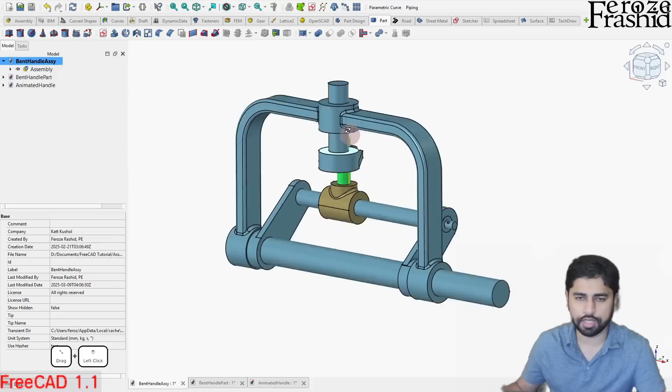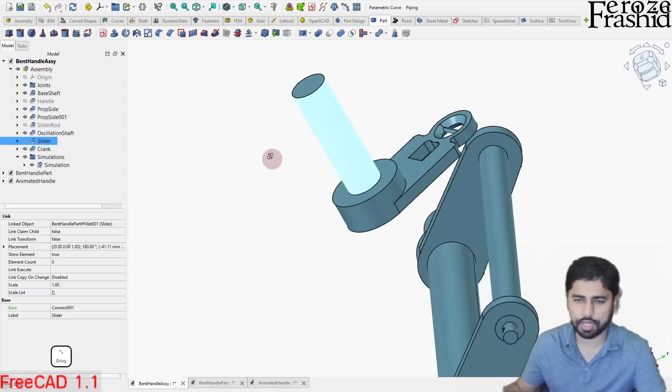Today we will focus on the driving shaft, specifically we named it crank here. To take a good look at it, let's hide everything else. So this is the one we want to build. We don't want to go into all the details right now. It will be a shaft and a shaft holder in the middle, and then a handle with a circular end. That's what we want to build in today's video.

Previously we created a file with a handle, and now we want to build another part. The first part of that is going to be a cylinder.

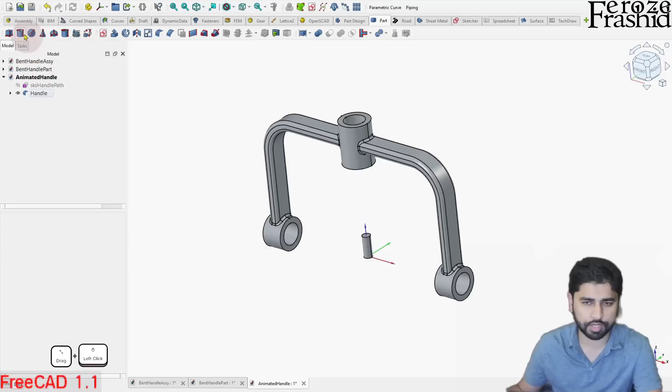So the cylinder, we can create a primitive right here. It's pretty easy - go into cylinder and then update the radius, say 5, and height, let's say 50 for now.

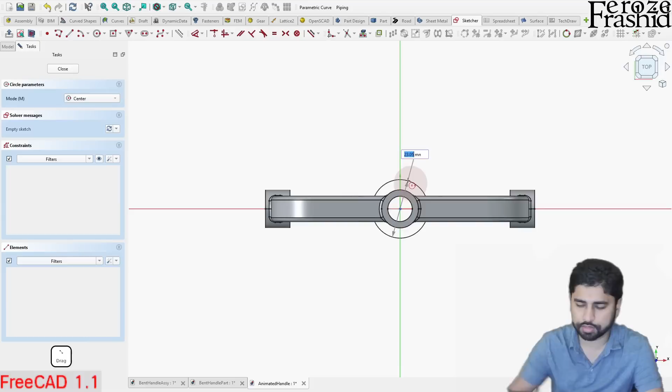That's one way to do it. Another way is the fully organic way: draw a sketch on the XY plane and draw a circle of radius 5 millimeters, diameter 10 millimeters. That's all we have in this sketch. We select this sketch and extrude it for the length we want, say 25 millimeters.

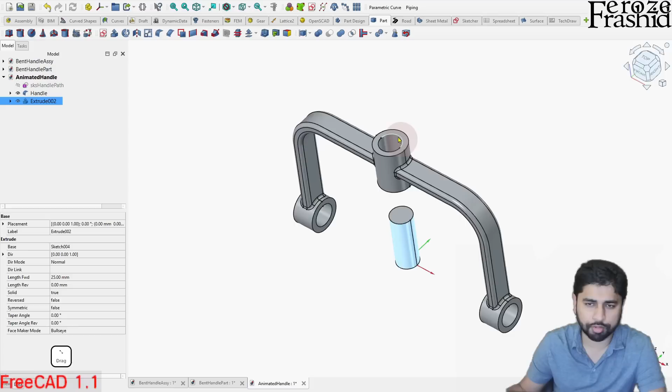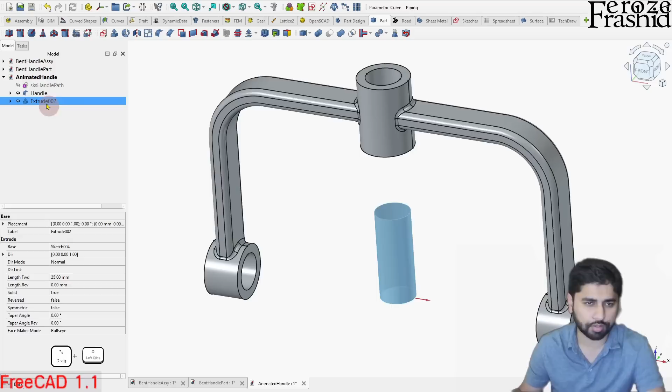It's important that this cylinder fits into the hole we previously created. I remember this hole being 10 millimeter diameter, so it's important that you create this as a 10 millimeter diameter cylinder as well. That's the first part. If we want to make it longer or shorter in length, we can come back and adjust it. So I want to rename it here and say shaft - driving shaft.

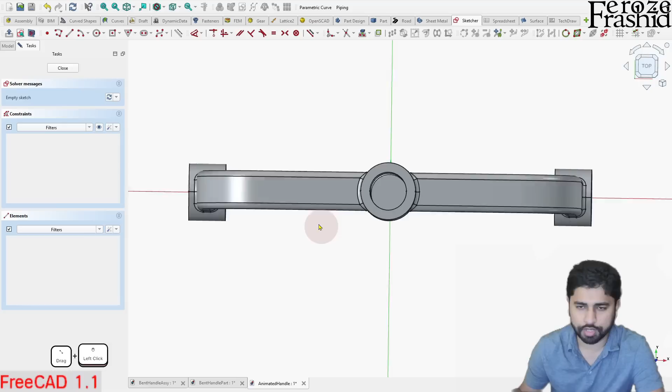Now I want to build this lower part. Maybe let's call that a crank. That one I want to draw from a sketch as well. Maybe we can hide this handle for now. Let's go back, and in here let's turn on the cross-section view.

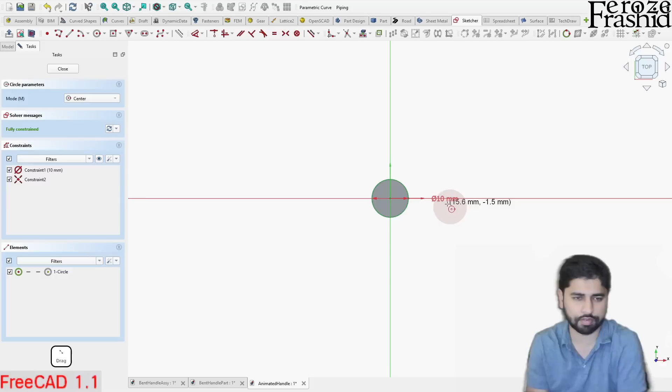Obviously the middle part will be a 10 millimeter diameter radius, and that's pretty much fixed, so we are not changing it. Let's not bother going into external geometries, referencing the previous part - we can just keep it simple. Then I want to draw an arc, something like this. There's an opening on the upper side, and I want to draw a rectangle to fill up that opening.

Let's refine this further. I want to delete this lower end, take these two points. Here's one trick: if you select these two points manually without pressing Control on the keyboard, they will be selected, because the sketcher mode has a hungry selection mode, so you can keep selecting.

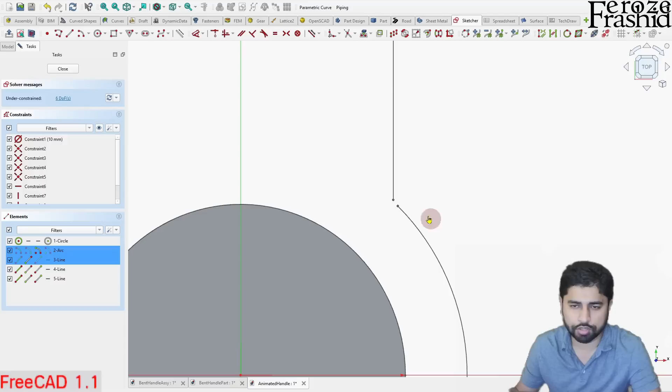Or you can go down-right, which will only select whole entities within that selection box. Going top-left will select everything that partially falls into that area. So we want to go select down-right - these two vertices are selected and we want to make them one point, so constraint coincident, or hit C on the keyboard.

Now these two are selected, but they're moving up and down. We want to bring them to the same level. So let's take these two vertices from the arc and hit H on the keyboard - that's H for horizontal - or you can get it from here, constraint horizontal.

On this part, I want to delete this top edge of the rectangle and make it a circular end as well.

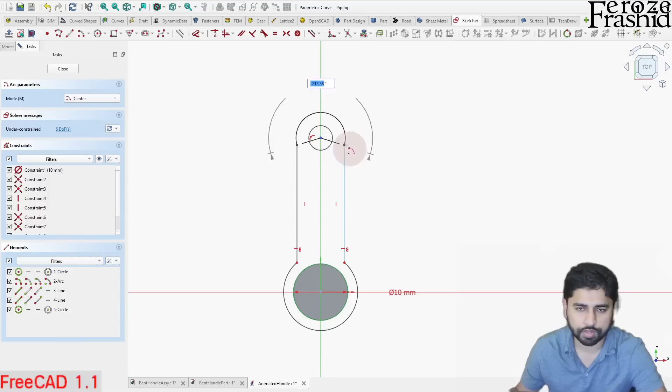This time I want to make this end smooth. So let's hit T on the keyboard, or press the tangency button from the toolbar, and select these two edges - that will make them tangent. Do the same on this side. So that is our end.

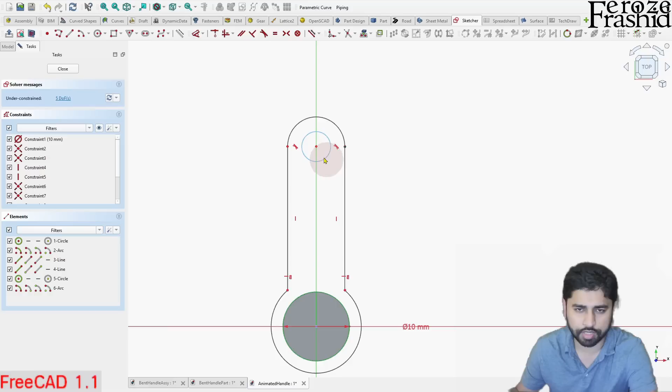On this end, the circular hole, we want to make it maybe 6 millimeters, so it's smaller than this one. And the radius of the end maybe 6 millimeters as well.

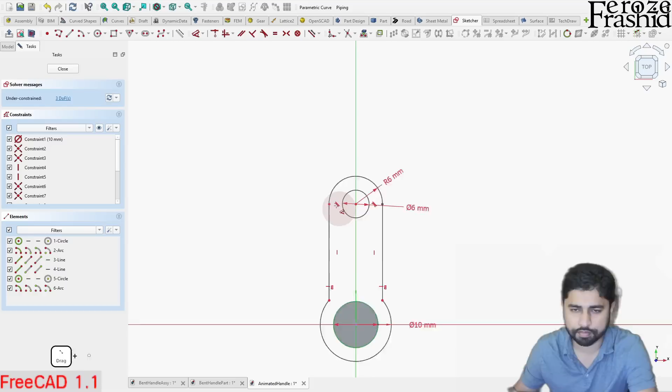Let's change the viewport - sometimes it does that. So this is going to be 6 millimeters. Maybe that's a little fat - let's bring it down to 5, and maybe this one 5 as well.

So we have 3 degrees of freedom left. Let's work on them one by one. One of them is the radius of this outer arc, which is going to be 8. And then two more degrees of freedom.

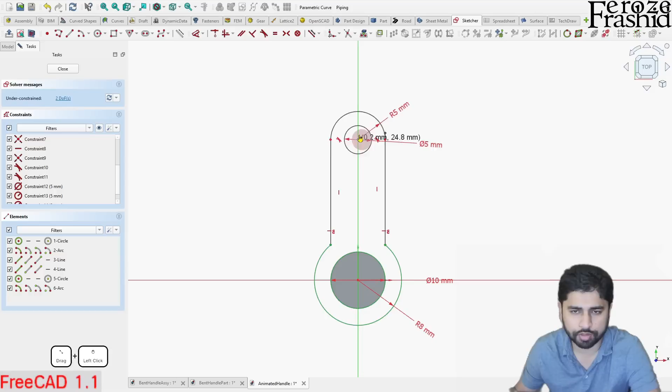I see that this point got disconnected, so let's take these two and hit C on the keyboard. And I see that got over-constrained, so that is a little issue.

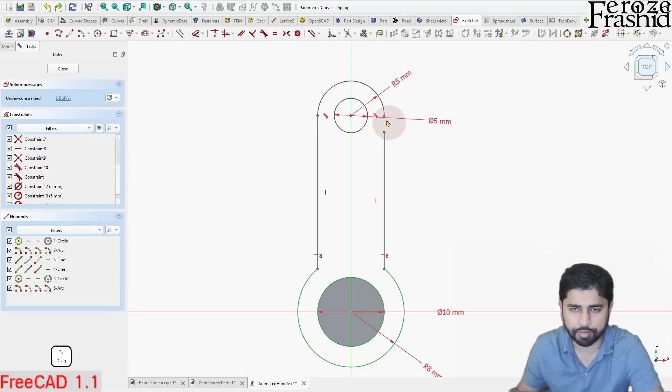Well, it's not an issue. Technically, the FreeCAD software is right, but it's not what we want. So let's hit Control Z. What we want to do, we have—so this point is already tangent, so that's 1 degree of freedom already applied there. So you can delete that tangency.

Now this is moving up and down, so now we can make these coincident, right? So that works too. So now we have 2 degrees of freedom left, and one of them is being not tangent. So hit T, correct that there.

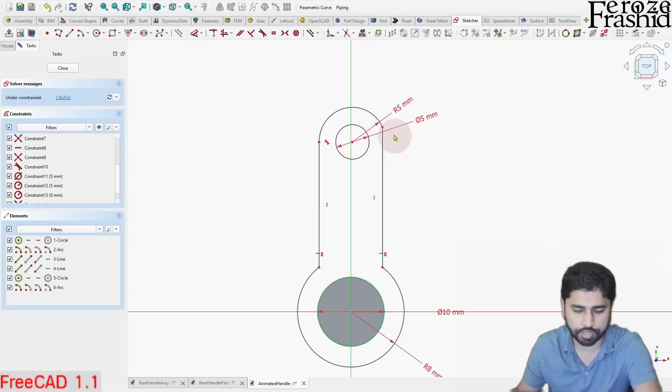So we just did the same thing, just we had to do it again. And that's a known fact of FreeCAD, not an issue, where you are adding a curve or an arc to a straight line—sometimes it doesn't take it easily.

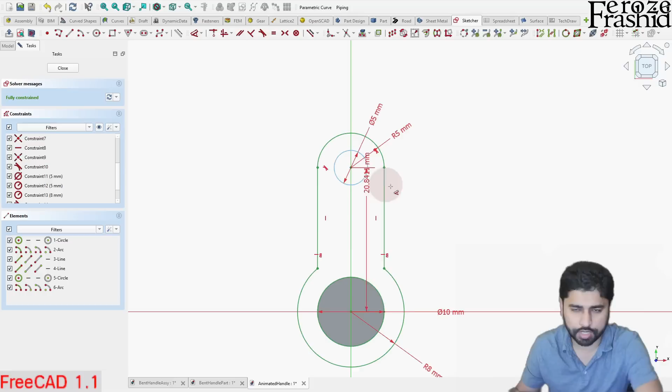And then 1 degree of freedom left, which is this length, the center between this circular hole and the end circular hole. So we can take this point and hit D on the keyboard, and let's say this is 20 millimeters. And on this one, I want to apply a name right here. Effectively, this is the length that we'll refer back to later on.

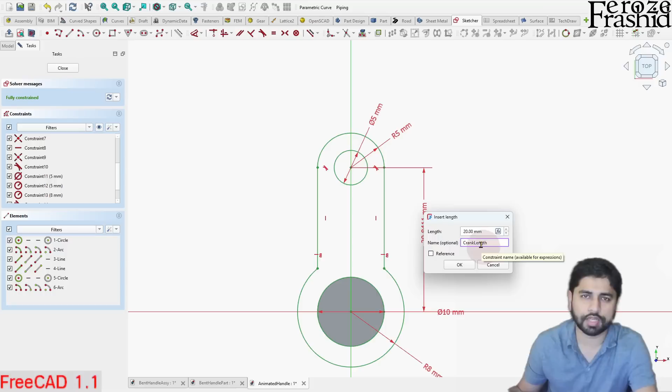So I just put a name in right there—it says optional. Notice that I did not put a space between the two words, but I did capitalize both. This is called camel case, and it does pay off later on.

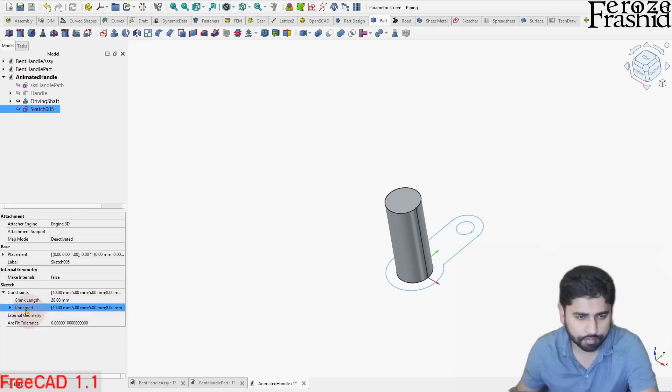Let me show you where that naming convention pays off. So on sketch 005, come to the data tab, under sketch, under constraint—you can see that all the constraints will show up right here. So there's unnamed, a bunch, and there's the named constraint. It says crank length, although we did not put a space in the middle, because of the capitalization of different words, it put a space right before the next capital letter.

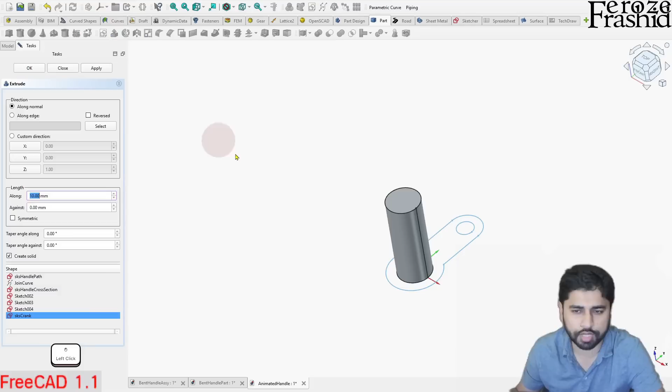Now let's go ahead and rename that as sketch crank. And I want to extrude that, say 5 millimeters. That's a little thick, maybe 3 millimeters. There.

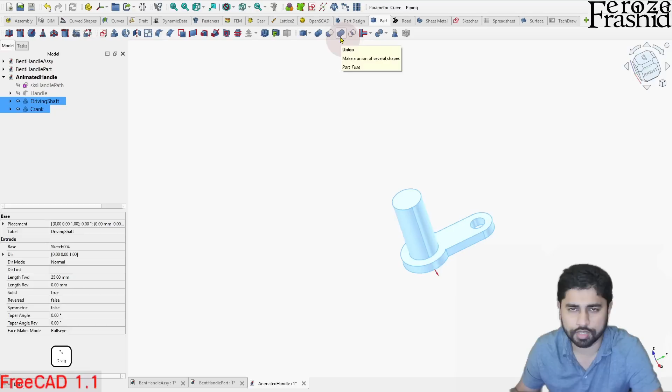So that is our crank. This is our driving shaft. And let's say I want to put them together. So select these two and unionize them, fuse them. And so that's our driver that will be driving the whole mechanism.

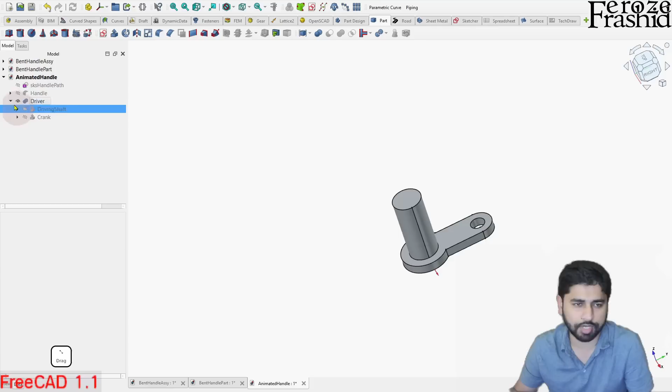Now, if you have a little experience in part design, by this time you already noticed that in part design, we don't have to put this together—it is already put together by default. In part workbench though, the user has more freedom, so we can choose which ones to put together and which to keep independent. If it was in part design workbench, we would have to make a conscious decision to have two different bodies to keep them separate.

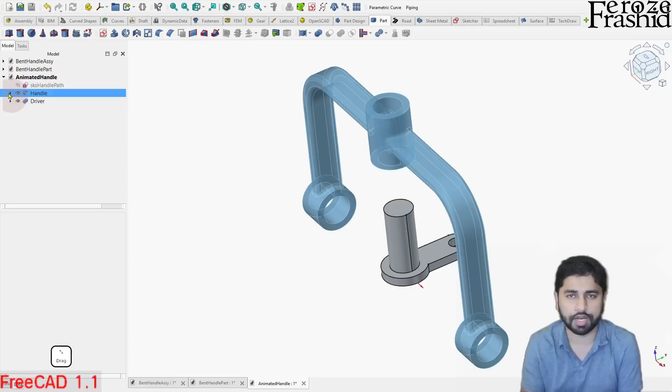But in part workbench, we've been doing bits and pieces and then putting them together one by one, which adds more work to us as users, but also at the same time gives you more freedom on which parts to put together and when. Sometimes sequence does matter, and then this feature, or the lack of it, in the part workbench puts you in an advantageous position.

All right, so now you will notice that we have created the driver, but it is not at the right place—it's at the wrong place. So we'll have to move it upward somewhere there, right? We have to do that.

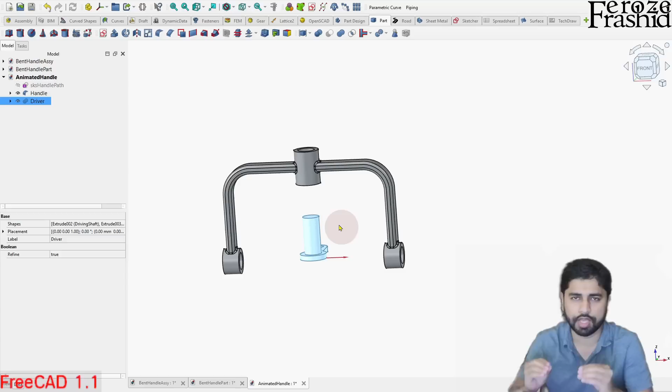However, because we have assembly work at the end of this series, we can keep it somewhere else—it doesn't have to be rightly placed. You can build everything at the origin, or in place, and then later on move them together in the assembly workbench. So we are leaving it at the origin, but I did notice one thing.

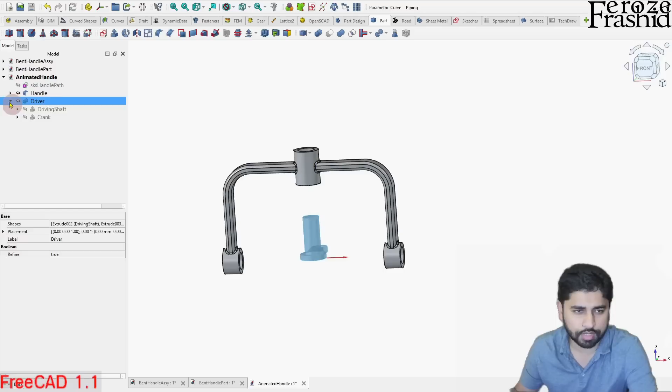If I want to put it together, it will be going up and down. So either we'll have to increase the shaft length, or we'll have to decrease this shaft holder from the handle. Since we are in the driver mode, let's go ahead and find the driving shaft right there. And then remember the length was 25 millimeters, right?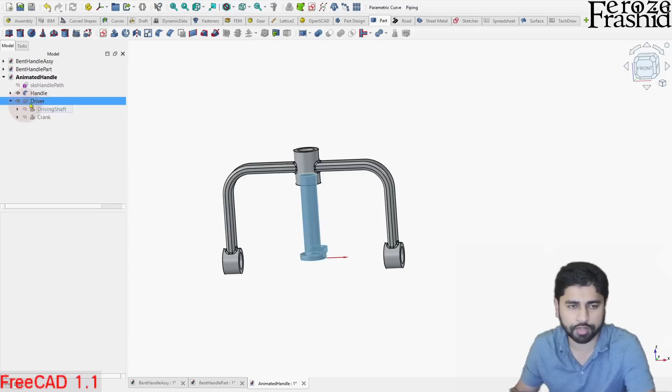We want to make that 50 millimeters there. But this is the value that we'll come back to and modify later on, so we'll come back to this value a lot. But right now, this gives us a wide range of going up and down on this mechanism. I have a feeling I'll have to reduce this height too, but we will leave it for the assembly work.

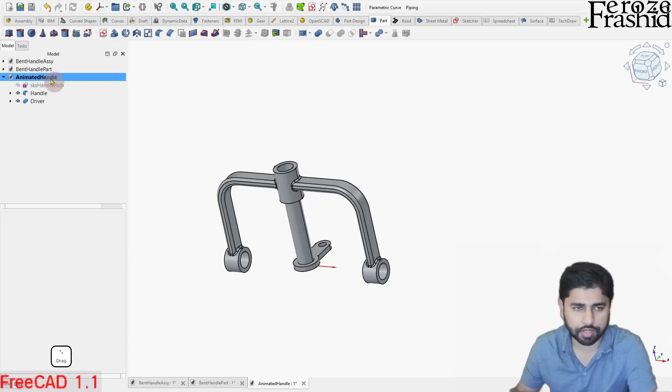So part two, second part done. In the next part, we will work on this shaft. Check out the next video.